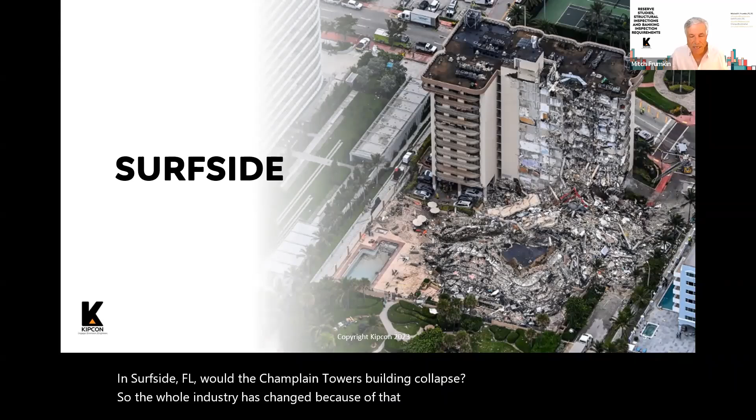Now, all of this started, as you're all aware, because of what happened in Surfside, Florida, with the Champlain Towers building collapse. The whole industry has changed because of that. Of course, 98 people were killed—it's an absolute tragedy. But out of tragedies, hopefully good things come out of them, and one of the things I'll talk about are some of the changes coming out of this that hopefully mean this can never happen again.

Now, for those of you who know me, you know I've been very involved in CAI for many years. I was president of the New Jersey chapter, the Pennsylvania chapter, and national president, among other things. I'm also one of the few engineers who not only does reserve studies but also gets involved in doing design specifications for existing buildings. Thanks to that background and my involvement with CAI National, I've had the opportunity to be involved in a number of interesting things that continue today.

For example, when the collapse first occurred in Florida, CAI immediately created a task force, which ultimately prepared a publication you can all get—it doesn't cost anything. It's called the Condominium Safety Public Policy Report. That report is pretty extensive, probably about 40, 50, 60 pages long. There were about 6 people from around the country who co-chaired this, and I was one of the co-chairs in developing this public policy report.

There were, I think, 2 managers, 3 attorneys—there wasn't another engineer among the co-chairs, so I was the only one giving a technical perspective. I had the opportunity to be involved as we pulled this whole thing together and issued it. We also reached out to over 600 people across the country for feedback, to other organizations like the American Society of Civil Engineers, and did research around the world to see what other people are doing.

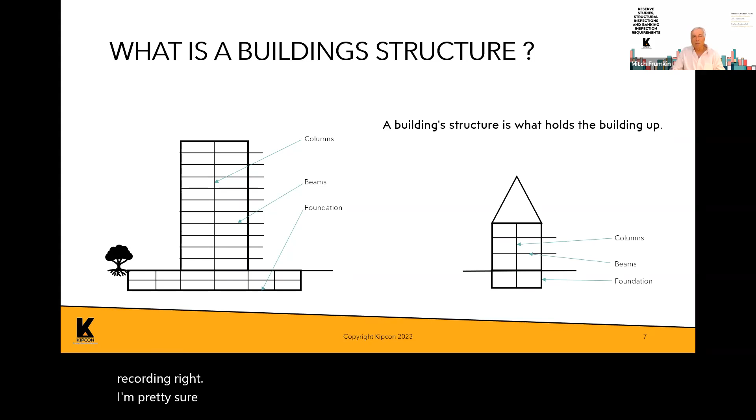Now you can see my pointer here, let me just make sure we are recording, right? I'm pretty sure we're recording this. Yes, you're good, Mitch. Oh, thanks, Chelsea — that's Chelsea, by the way, from Kipcon.

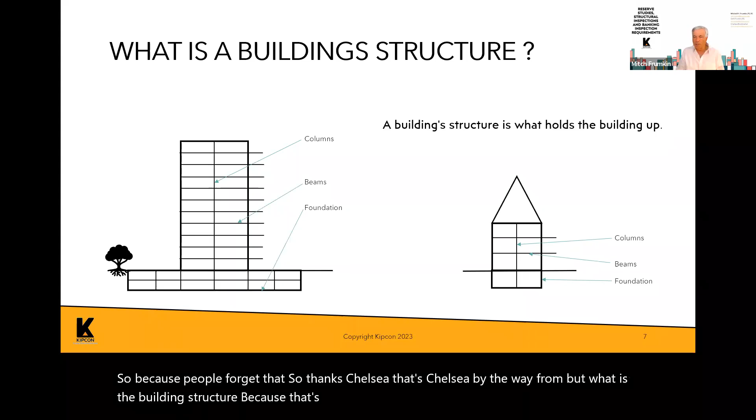But what is a building structure? That's the key to everything we're doing. The building structure is what holds up the building, that's essentially what it is. If you look at a building on the left, it's a high rise; on the right could be a townhouse, but it's made up of columns — the vertical guys that hold up the floors, the roof, and all kinds of things. Then there are the beams that go across the building that hold up the floors, and then there's the foundation. So a building structure is primarily made up of the columns and the beams.

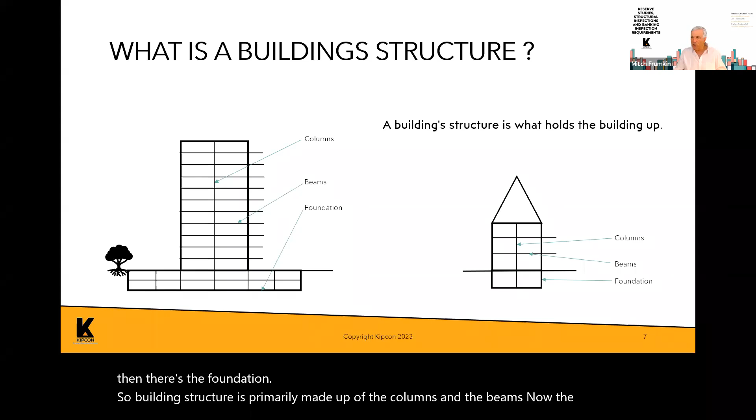Now, the reason I'm saying that is because balconies, such as you see here, are generally not considered part of the building structure, because they primarily support only their own weight — they don't support the weight of the building.

So if a balcony falls, like we saw in the picture, the building isn't going to collapse. But if a column or a beam in this building fails, then the building could fall down. So there's a discrete and pretty important difference between them that I'm going to touch on as I go through the presentation.

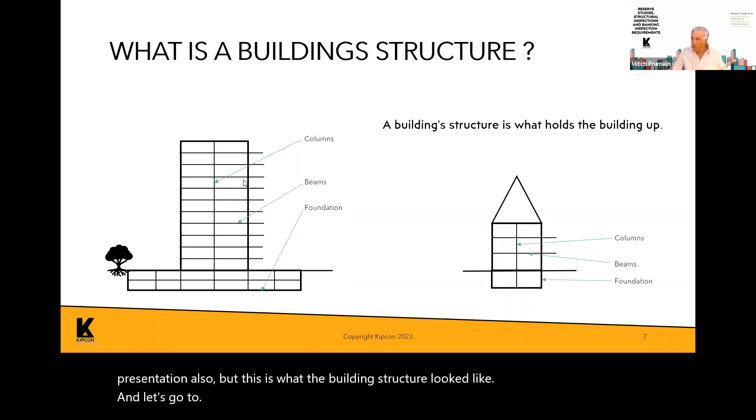But this is what the building structure looked like. And let's go to... let's see why aren't- if I go. All right, there we go.

So here is the building's primary load-bearing system. Now, the reason I use the term primary load-bearing system is because when you get into the regulations, both in CAI's public policy as well as legislation in New Jersey and other states, they use that terminology for inspecting a building.

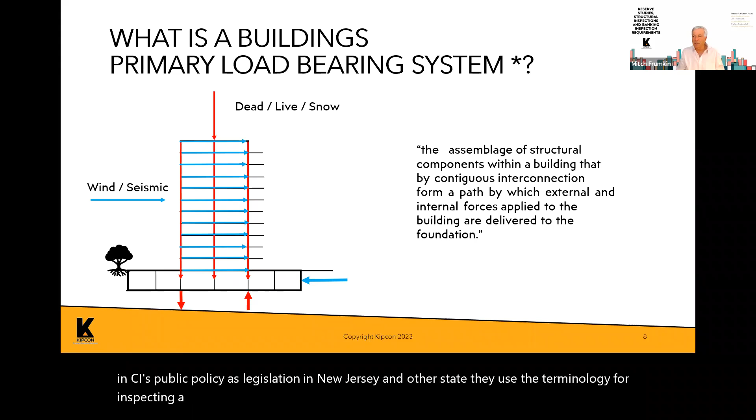The primary load-bearing system is the parts of the building that, if something happened to them, the building could collapse. The definition, taken directly from the legislation pending in the state of New Jersey as well as other states, is that the primary load-bearing system is the assemblage of structural components within the building that, by being connected to each other, form a path by which external and internal forces, such as wind, snow, and the weight of the building, are applied or delivered to the foundation.

So in this diagram, you see the weight of the building coming down vertically, the weight of the people inside, the live load, the snow on the roof, coming down through this bearing system in a vertical direction into the foundation. But from the side, you have wind loads and earthquake loads, which come in from the side and are also brought down to the foundation. That's the definition of primary load-bearing system.

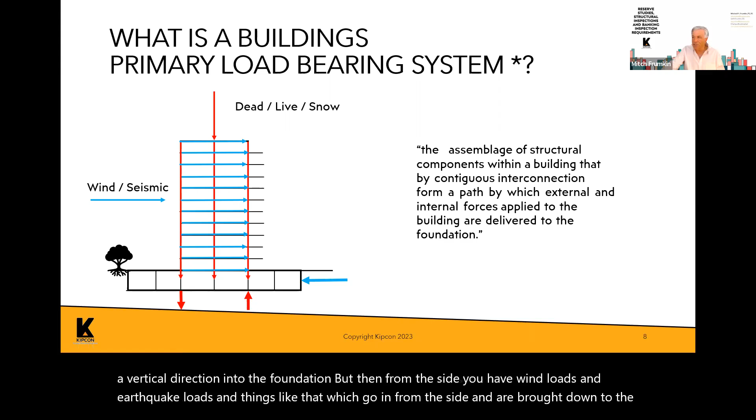Now, the reason why- some of these slides are relatively new, because things are changing, like I said.

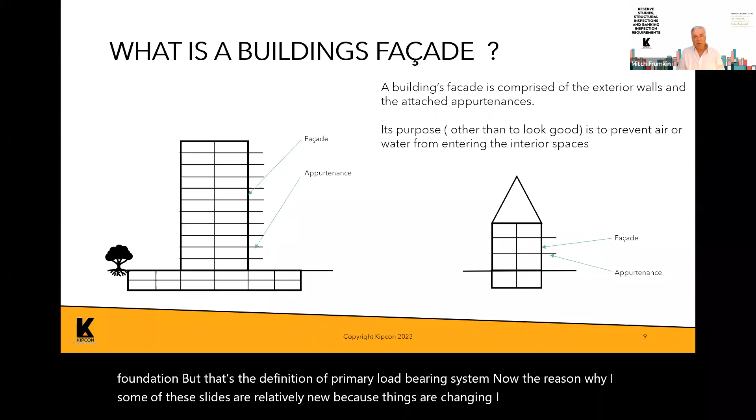Now let's talk about what the building facade is. The building facade is the exterior walls of the building. So for example, in this building, the exterior facade are these walls on the outside. The purpose of the facade is of course to look good and make the building look good, but it's also to prevent air and water from entering the interior spaces.

So these facades- now, when you look at definitions of facades in a number of different places, it says the facade is made up of the exterior walls as well as the appurtenances. That's a common word that's used. The appurtenances are the things attached to the facade, such as the balcony.

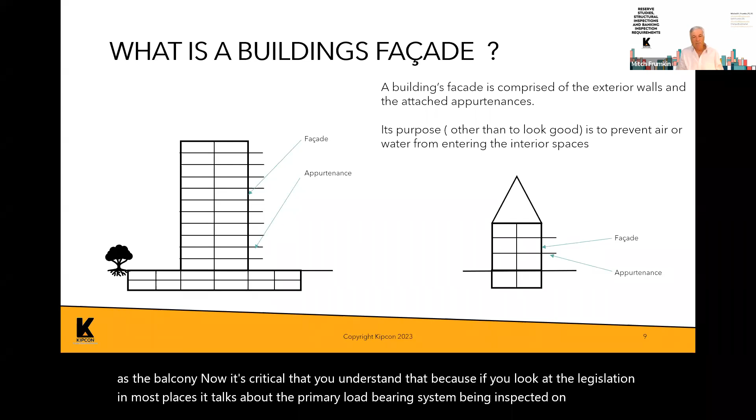Now, it's critical that you understand that, because if you look at the legislation in most places, it talks about the primary load-bearing system being inspected on a periodic basis, but it doesn't talk about inspecting the facade, which is critical, since the balcony is part of the facade, and the balcony can collapse.

Now, the original thought on this- well, let's put it this way: in about 13 or 14 cities across the country, there are facade inspection requirements where building owners are required to inspect the facades of their buildings. It's generally on a 3 to 5 year basis, to make sure that nothing on the building will fall and hit somebody walking by.

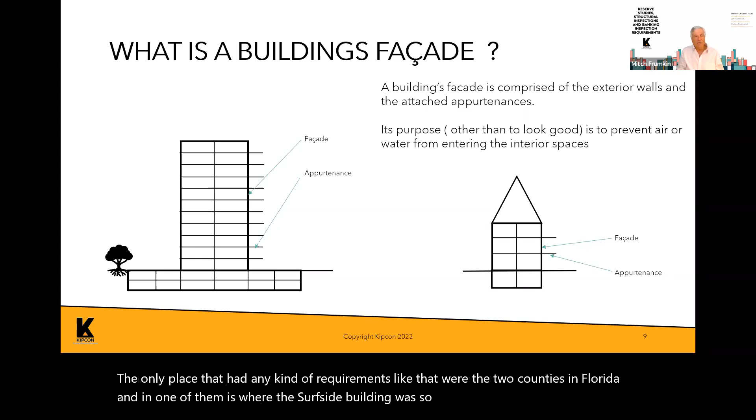But until recently, there was no place in the country with specific ordinances requiring you to inspect your building structure to make sure it didn't fall on the people inside. The only place with any kind of requirements like that were the 2 counties in Florida, and one of them is where the Surfside building was. So clearly the inspection frequency and things were not good enough to keep something like this from happening.

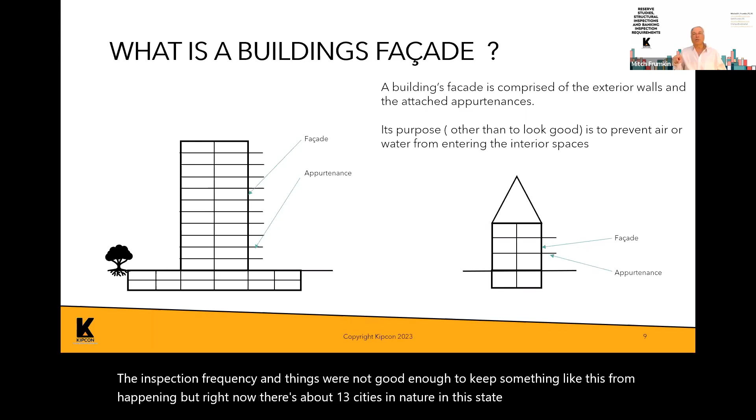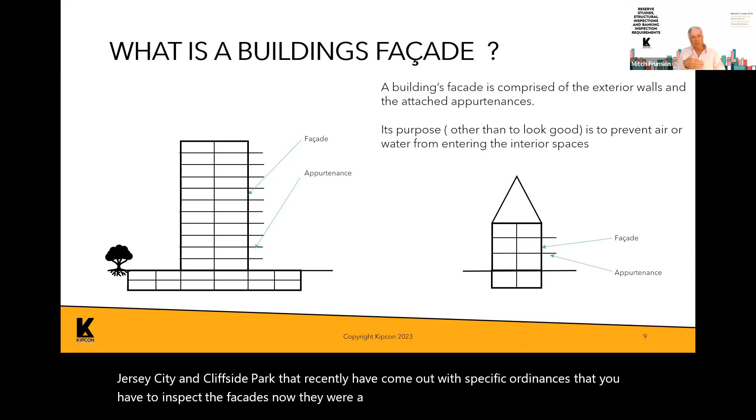But right now there are about 13 cities in the country that have facade ordinances. I'm going to show you that in the state of New Jersey, there are 2 localities, Jersey City and Cliffside Park, that recently came out with specific ordinances requiring facade inspections. They were a little ahead of the curve here in a good way, because, for example, the CAI National Public Policy is going to be revised, and one of the things on the agenda is the inclusion of facades and balconies into the public policy.

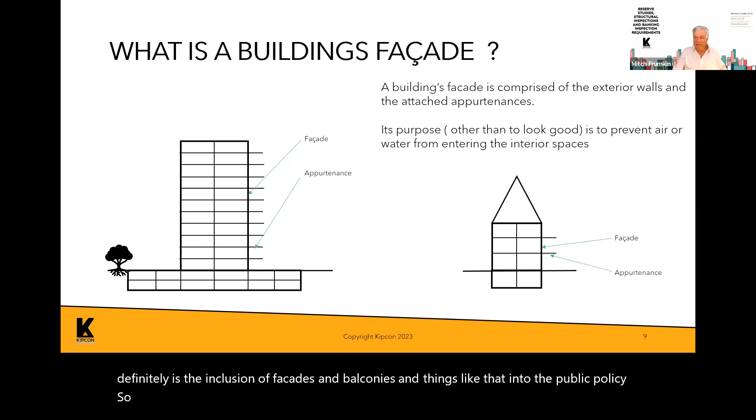So it's very important to recognize that everything I'm going to talk about, legislatively in New Jersey and every other place this is happening, as well as the public policy, talks about reserve studies and funding the reserves, not just doing one.

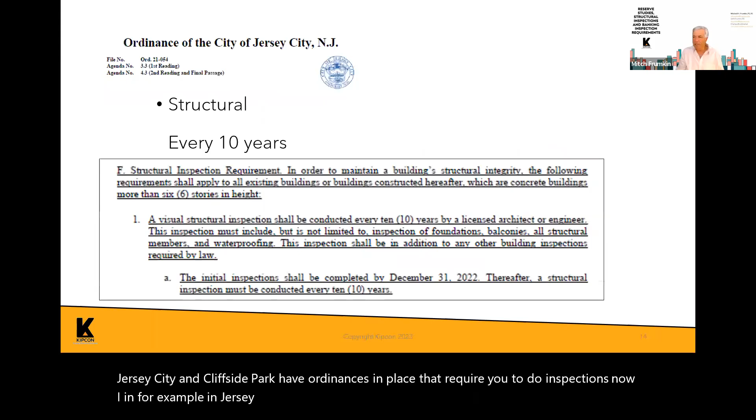And this is what it says, and I'm not going to critique it unless you call me on the side, and I'd be happy to, but it says: in order to maintain a building's structural integrity, the following requirements shall apply to all existing buildings or buildings constructed hereafter, which are concrete buildings more than 6 stories in height. Now, you'll see as I go through my presentation whether or not I agree with how it's defined, but they require this type of structural inspection by a licensed architect or engineer.

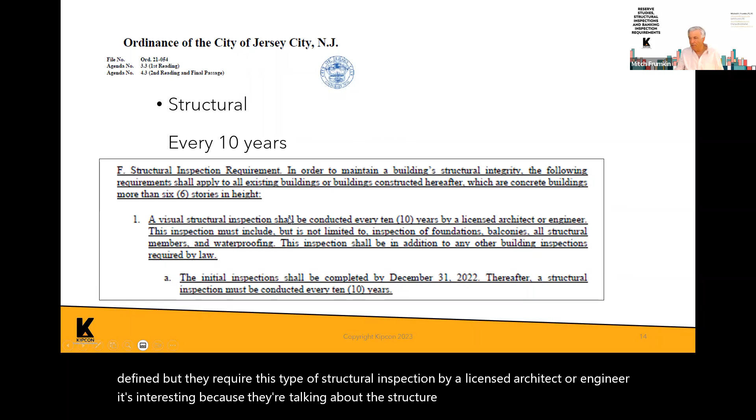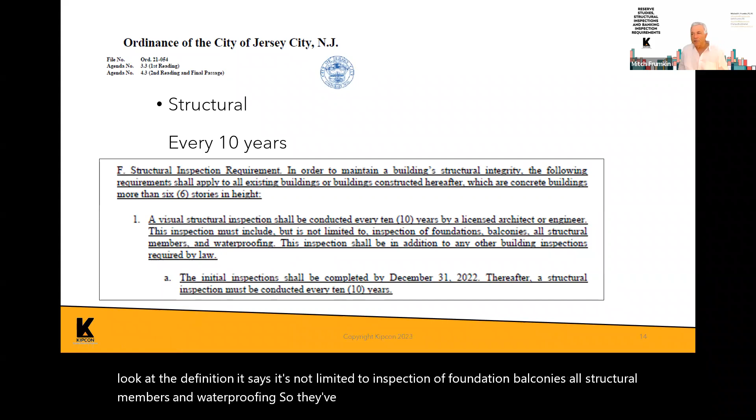It's interesting because they're talking about the structure. It's interesting but good. But if you look at the definition, it says it's not limited to inspection of foundation, balconies, all structural members, and waterproofing. So they've included some things in here in their definition of a structural inspection that are not, first of all, based on a primary load-bearing system.

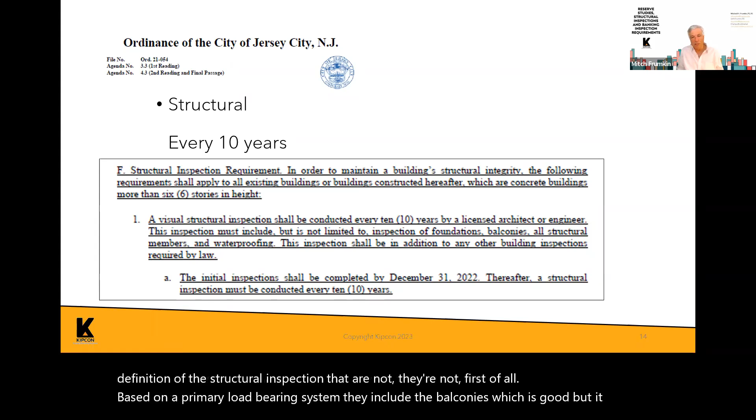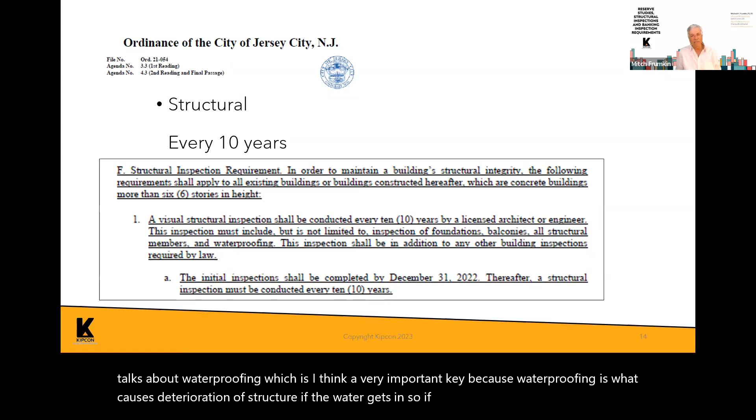They include the balconies, which is good, but it also talks about waterproofing, which I think is very important, because waterproofing is what causes deterioration of structure if the water gets in. So if the exterior of the building is kept functional and water doesn't get in, it'll reduce the likelihood of structural deterioration. The thing that's interesting here is, if you look at the definition of structure versus facade, you would think this waterproofing would be in the facade inspections, not the structural inspections.

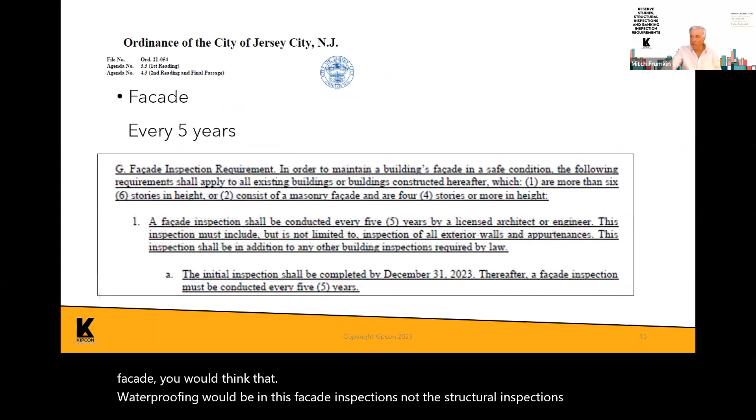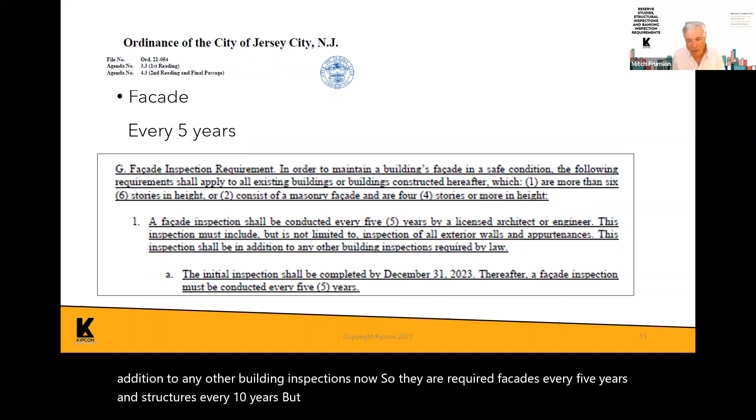But this is Jersey City. Here's what Jersey City says about facades, that they have to be inspected every 5 years. This must include inspection of the exterior wall and the appurtenances. This inspection will be in addition to any other building inspections. So they are requiring facades every 5 years and structures every 10 years, but they're including some of the things that you would think are included in the facade within the structure. So there's some different things going on here.

The other thing to keep in mind is they say that the facade inspections are for all buildings which are more than 6 stories in height, or consist of a masonry facade or brick and are 4 stories or more in height. So they're going into a little more specific detail of what's required to be inspected.

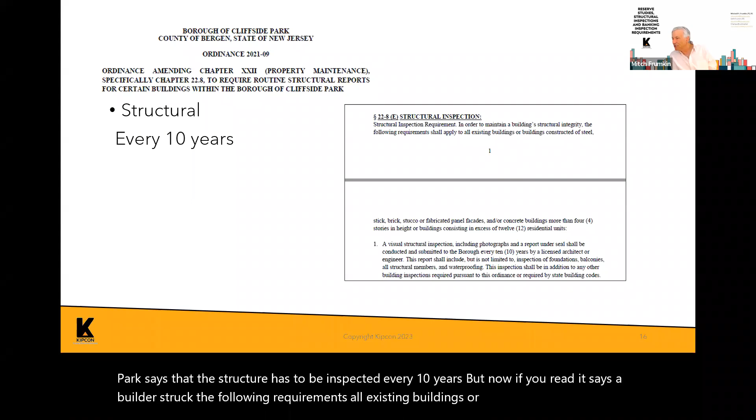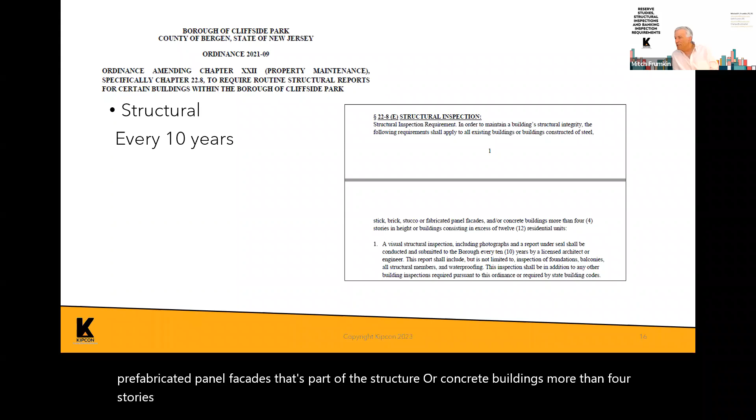So this is Jersey City. Now let's go on to Cliffside Park. Cliffside Park says that the structure has to be inspected every 10 years. But if you read it, it says it applies to all existing buildings or buildings constructed of steel, brick, stucco - stucco is generally a facade, not a structure - or prefabricated panel facades, that's part of the structure, and/or concrete buildings more than 4 stories in height, or buildings consisting of in excess of 12 residential units. So they're saying that if you have a residential building, irrespective of height, that has 12 residential units and is made up of these materials, it needs to be inspected.

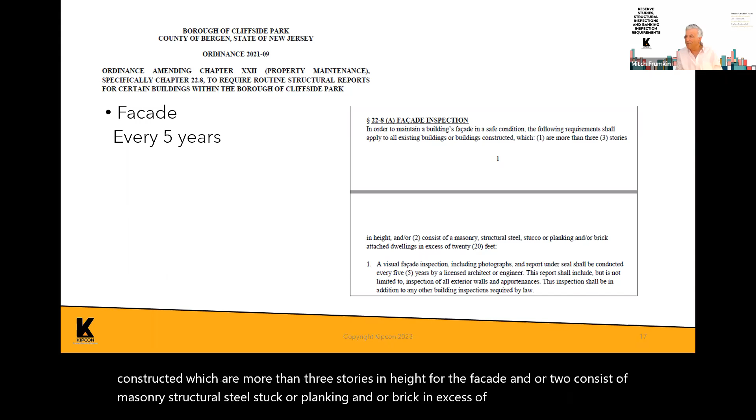But you see here that between Jersey City and Cliffside Park, there are differences in definitions of what's going to be inspected and how often. Now if you look at Cliffside Park for facades, it says every 5 years, and requirements shall apply to all existing buildings or buildings constructed which are more than 3 stories in height for the facade, and/or consist of masonry, structural steel, stucco or planking, and/or brick in excess of 20 feet. So they're saying that for the facade, you have to look at if it's more than 3 stories high or more than 20 feet in height. So you may have a 2-story building that's only 20 feet high, and it appears that it should be included.

But the point I'm showing you this stuff is, and it's not just New Jersey - these are some New Jersey examples - but for example, in Manhattan, they have Local Law 11 for building facades. They just came out in the last year or so with a specific requirement for inspecting parking garages. So I'm concentrating on New Jersey, but these types of regulations are happening or in place in a number of different places.

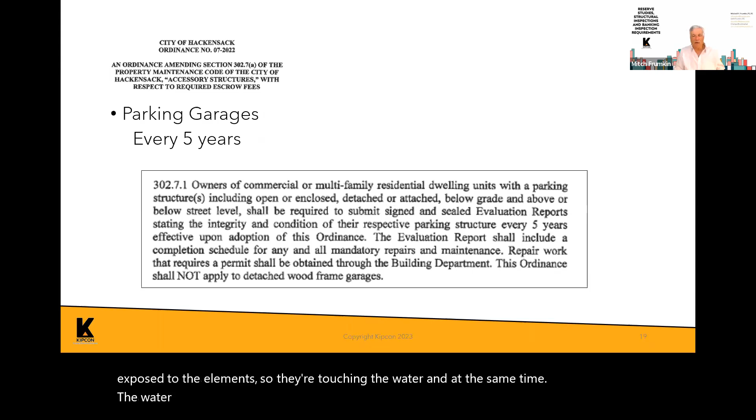Now, parking garages, as I mentioned before, are a high kind of risk structure because they're exposed to the elements, so they're touching the water, and at the same time, the water that's in there, especially in the winter, carries salt in it, which increases the rate of deterioration. So these are some of the things that are going on legislatively.

Now let's talk about this from a structural perspective, and now I'm talking about the legislation in New Jersey. Keep in mind the legislation in New Jersey, as of right now, is based on the primary load-bearing system.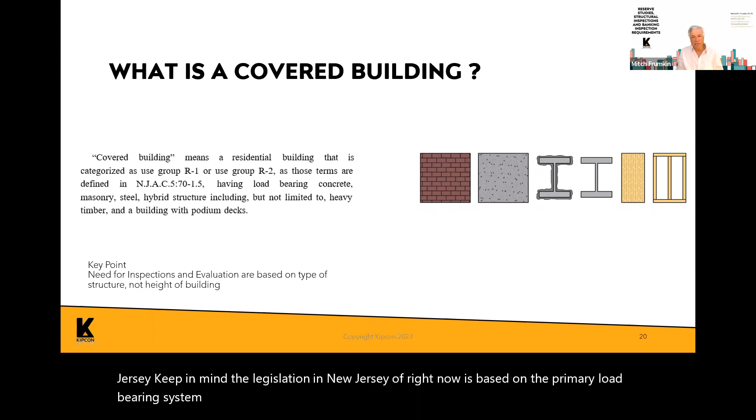Based on what happened in Sea Isle City with the collapse of the balcony, there has been a recent recommendation, in the last couple of days, that the legislation be updated to say primary load-bearing system and balconies on the exterior of buildings. So my guess is that if this legislation goes ahead, it is going to include balconies, but maybe not facades. We'll see.

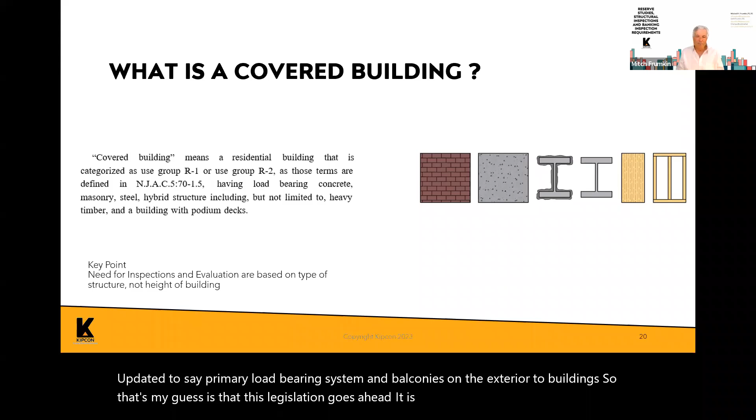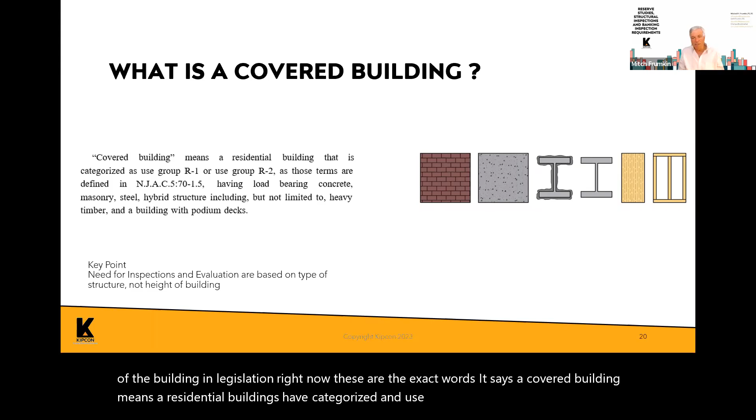It's like I said, it's a work in progress. But if you look at just the structure of the building in the legislation right now, these are the exact words. It says a covered building means a residential building categorized in use group R1 or R2, which means it's multifamily residential attached units, having load-bearing concrete, masonry, steel, hybrid structure, including but not limited to heavy timber and a building with podium decks.

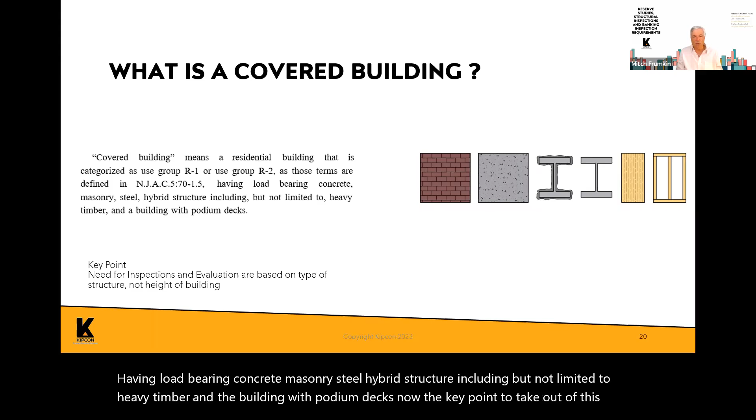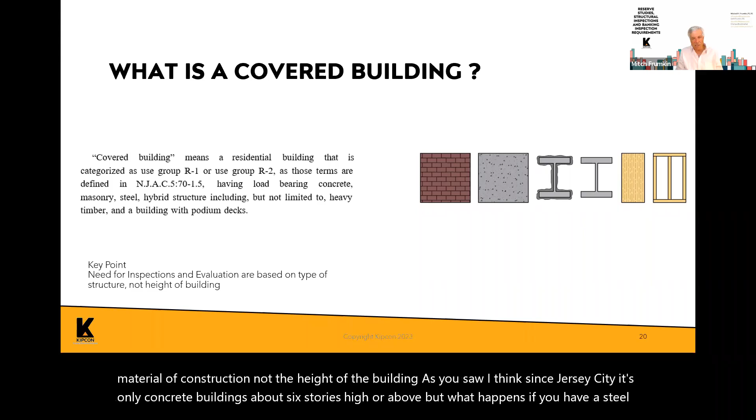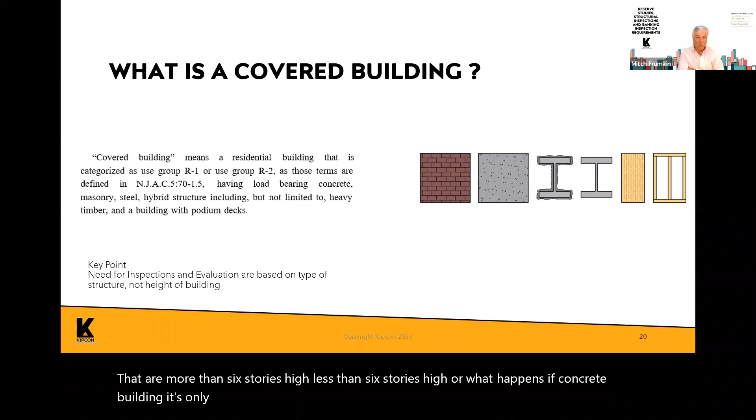Now, the key point to take out of this, which I consider to be the right way to do it, is that the structural inspections are based on the material of construction, not the height of the building. As you saw, I think it's in Jersey City, it's only concrete buildings about 6 stories high or above. But what happens if you have a steel building that's more than 6 stories high? I've seen problems with steel buildings more than 6 stories high and less than 6 stories high. Or what happens if you have a concrete building that's only 4 stories high? I've seen concrete buildings 4 stories high that have structural problems. So the key point to keep in mind is that the need for inspections and evaluation is based on the type of structure, the materials, not the height of the building, which is also what the public policy says.

There's the CAI National Public Policy, and there are also national standards put out by the American Society of Civil Engineers. There's one standard titled Evaluating the Structure of Existing Buildings, and it has guidelines for evaluating the structure, which all of these standards reference. It talks about inspecting buildings and evaluating based on materials, not based on height.

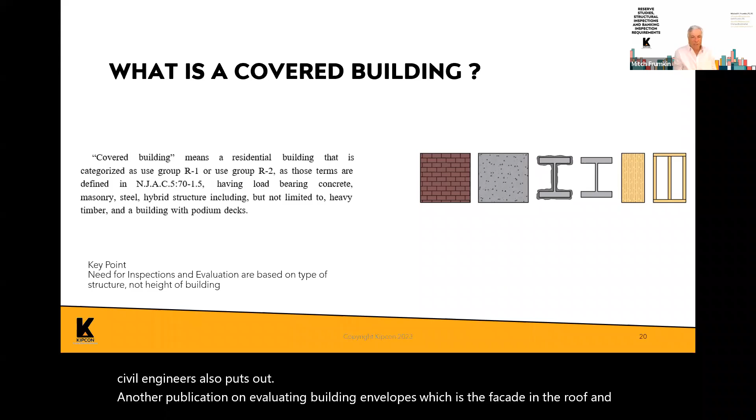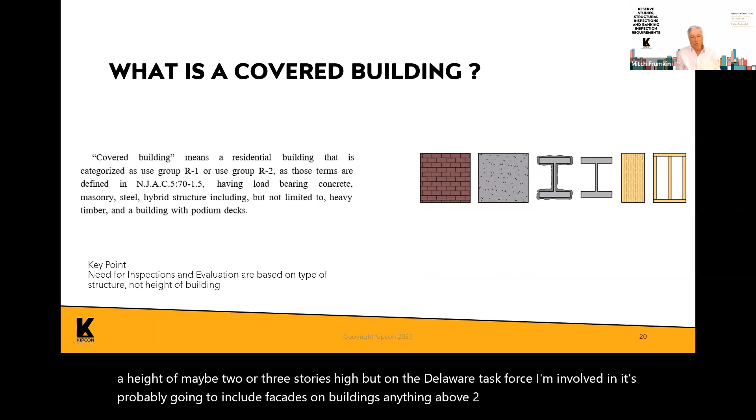When it comes to facades, it is generally based on height. The American Society of Civil Engineers also puts out another publication on evaluating building envelopes, which is the facade and the roof, and it talks about the height of the building. In most places it starts with a height of maybe 2 or 3 stories high, but on the Delaware task force I'm involved in, it's probably going to include facades on buildings anything above 2 stories high, because we want to make sure we capture all balconies, not just the facade itself. So, from the legislative perspective in New Jersey in regard to structure, this is what constitutes a covered building.

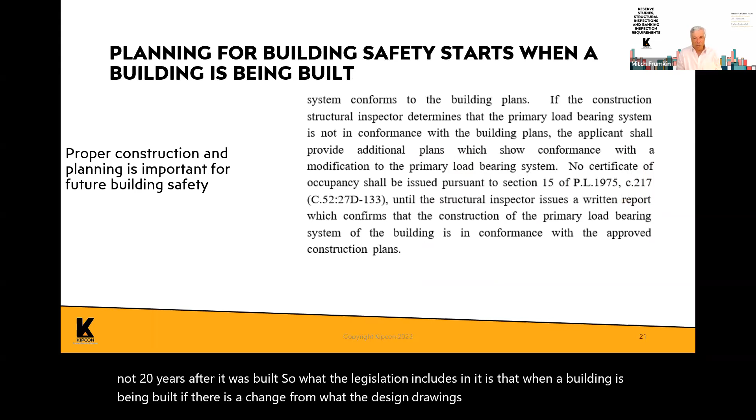There are other things in the current legislation, I'm not going into as much detail as yesterday, but I want to point out some things. It says that building safety starts when a building is being built, not 20 years after it was built. So the legislation includes that when a building is being built, if there's a change from what the design drawings show in regard to the structure, before a certificate of occupancy is issued for that building, there has to be an engineering report that says the structural adequacy of the as-built building is equivalent to what the design drawings show.

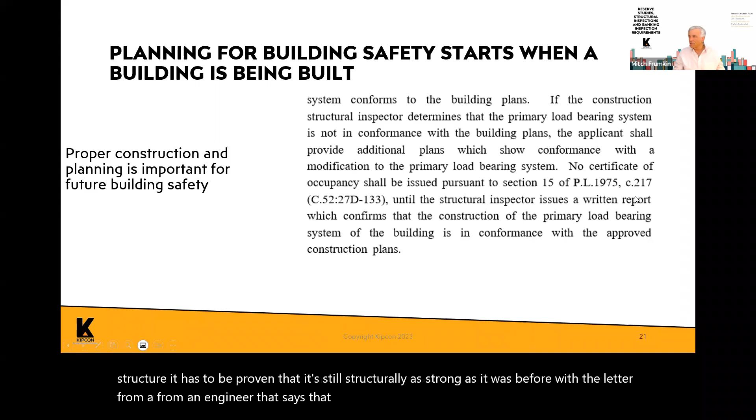Now, I think we all recognize that buildings are never built exactly the way the drawings show, but this clearly says that if it affects the structure, it has to be proven that it's still structurally as strong as it was before, with a letter from an engineer that says that. The structural inspector issues a written report confirming that it's equivalent. These are the exact words from the legislation.

Then what about the inspections? The legislation now says that for a building built after this legislation comes into effect, the first structural inspection takes place 15 years after the bill's passage, and I'll go back to that in a second, why. It also says for buildings built prior to the passage of this legislation, when it goes into place, for buildings that are 10 years or more since they were built, so at least 10 years old, the first inspection has to take place within 2 years.

For buildings that were built within 5 to 10 years, it's 4 years. And at buildings that were built in the last 5 years, the first inspection has to take place within 6 years.

Now, just so you know, the way the bill was originally written, it says that all buildings have to be inspected within 2 years prior to this legislation. But based on discussion, it was kind of agreed, and this is a pending modification, that there's so many buildings, how are you going to inspect them all within 2 years? So let's phase them in based on the age of the building, because deterioration that causes structural problems is a progressive problem. So if the building's newer, there's less chance of having these type of things happen.

The reason for the 15 years for buildings built after the passage of this legislation is that right now, if you build a new condo or community association in New Jersey, the developer is required to put together a reserve study in the governing documents. The legislation also requires that for all new buildings going forward, not only will it require a reserve study, but it's also going to require that a maintenance manual be included that outlines when the preventive maintenance should be done, what the preventive maintenance is, and what the cost of the preventive maintenance will be in the future.

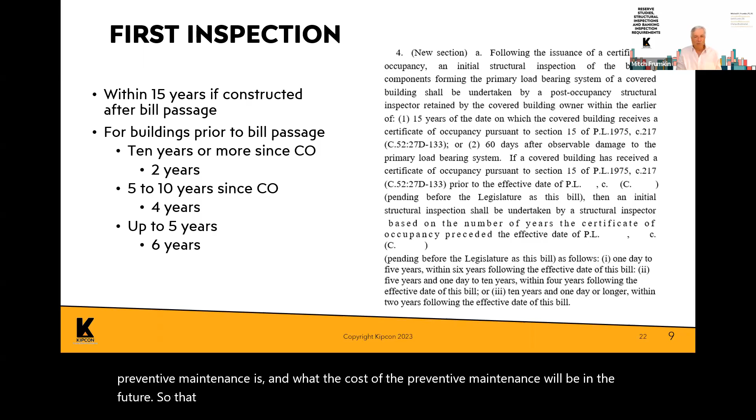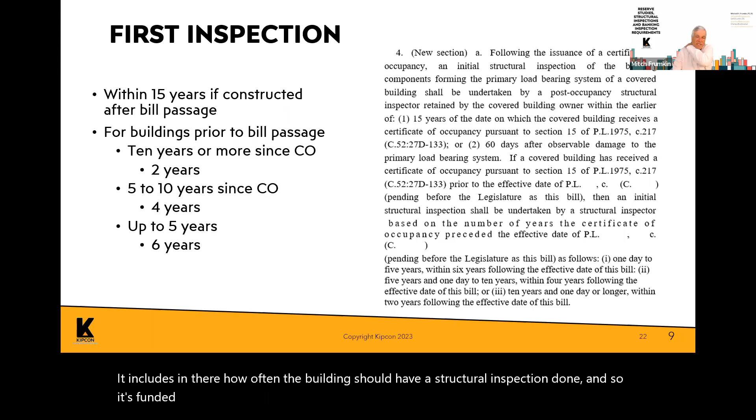So it was agreed that since there's going to be preventive maintenance put in place, the first inspection doesn't need to take place until later. But also the legislation requires that as part of that maintenance manual, it includes how often the building should have a structural inspection done. And it's funded also, and it's in the legislation that it needs to be budgeted for. So based on that, that's why it was agreed that 15 years after the bill's passage is good.

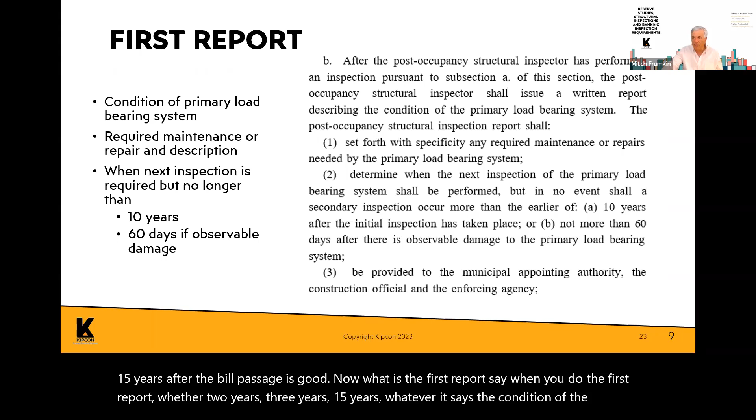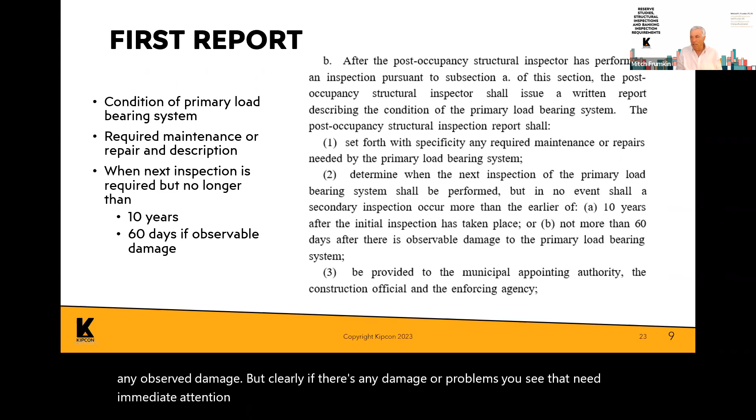Now, what does the first report say? When you do the first report, whether 2 years, 3 years, 15 years, whatever, it says the condition of the primary load-bearing system, any required maintenance or repair, and the description of what needs to be done. It also says when the next inspection is required, but it's no longer than 10 years from the first inspection report, or 60 days if there's any observed damage. But clearly, if there's any damage or problems you see that need immediate attention, it has to be taken care of right away.

So this is what the legislation says. And again, this legislation pretty much mimics what the national public policy says and what's being done in other states.

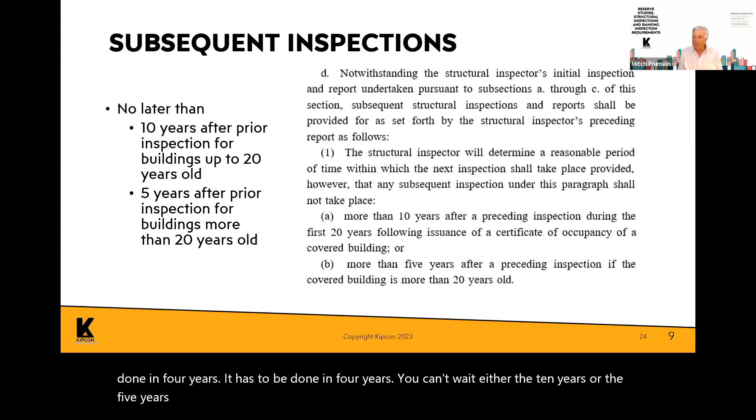So after the first inspection is done, what about inspections after that? For buildings that are up to 20 years old, inspection is a maximum of every 10 years. For buildings after 20 years old, every 5 years. But it says maximum. The reason it says maximum is because the prior report says it has to be done in 4 years - you can't wait either the 10 years or the 5 years. But this is what it says in the legislation. That's the bold points on the left, and on the right is the actual words from the legislation.

All right, now let's switch topics for a second in terms of mortgage lending changes. And again, it's very interesting because I've gotten involved in some interesting stuff. As a matter of fact, when it comes to Fannie and Freddie, you probably all know they've come out with forms to do inspections, and you have to confirm the safety of the building in order to get mortgages and refinances and all kinds of stuff. So they came out with a form, which you're all familiar with.

The reserve funding requirement was in there before. It's been there forever. What they generally say is that in order to prove adequate reserves, you have to be setting aside 10% of your annual budget into reserves. Up until a few years ago, it also said, or fund in conformance with the reserve study done in the past couple of years. Now, as of right now, Fannie says it's 10% of the annual budget. Freddie says it's 10% of the annual budget, but if you have a reserve study, you can go by what the reserve study says.

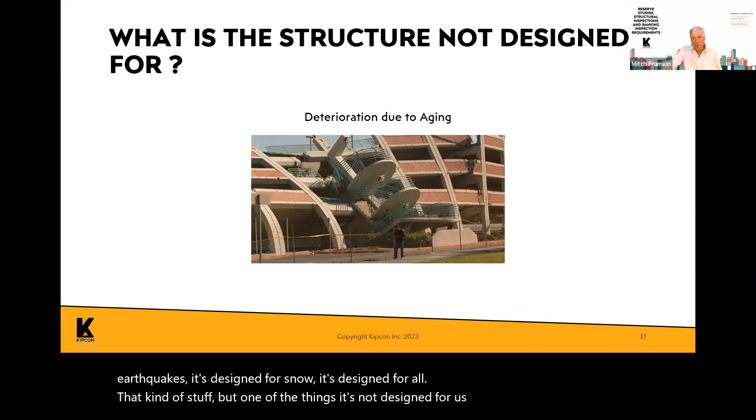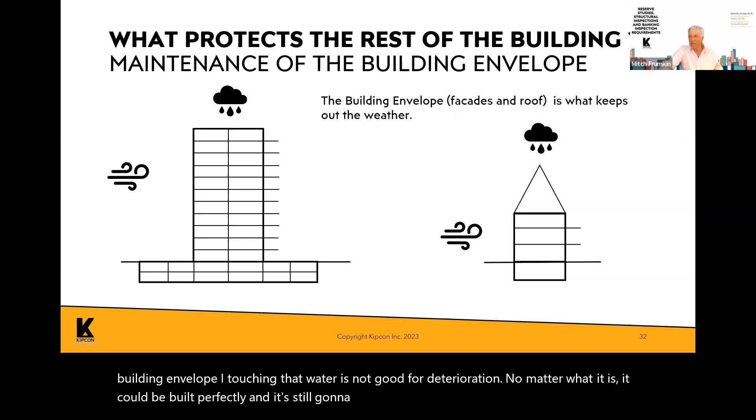So we talked about what a building is designed for. It's designed for the wind, earthquakes, snow, all kinds of stuff. But one of the things it's not designed for is deterioration due to aging. So that's what all of this is about. What protects the building? It's the maintenance of the building envelope. Water is not good for deterioration. No matter what it is, it can be built perfectly and it's still going to age, and water causes it to age faster.

So a couple things - what is maintenance? Maintenance is key to everything I'm talking about. A lot of people look at maintenance as one term, but it's the process of preserving something. It's very important to recognize there are 3 different types of maintenance you should be aware of. This is going to be detailed in 10 pages rather than 2 minutes in the upcoming best practices paper the CAI is issuing regarding maintenance.

The type of maintenance a lot of people do is called deferred maintenance. Deferred maintenance means you defer it and you don't do it. Deferred maintenance is not what you want to do, because you're not doing anything. So there are 2 other kinds of maintenance you should be doing.

The first is preventive maintenance - a proactive plan to maintain something so it stays in good condition and attains its useful life. For example, if you have something on your reserve study with a 20-year life, preventive maintenance will make sure you get at least that 20-year life out of it. But there are other things that are part of your building, like the structure, that aren't on your reserve study. The structure should have some type of preventive maintenance done to it. Sometimes preventive maintenance is as simple as doing an inspection to make sure the condition is good, but it's proactive - something you plan to do.

Corrective maintenance is when you don't do maintenance and something happens to the building, so you have to correct it - that's called corrective maintenance. It's something you can't plan for, following detection of a problem. A lot of times it's because you used deferred maintenance instead of preventive maintenance. There's going to be a quiz on this soon, by the way.

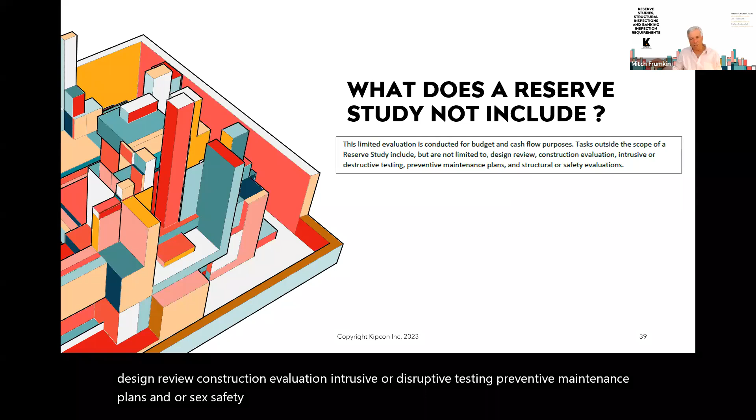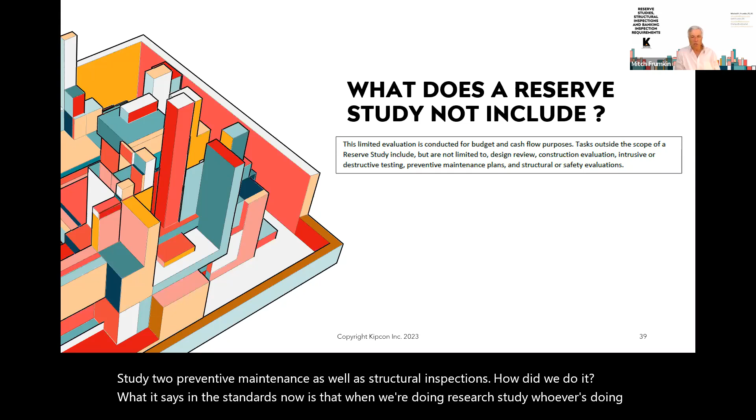So the question is, if we were trying to connect as part of these new standards the reserve study to preventive maintenance as well as structural inspections, how did we do it? What it says in the standards now is that when we're doing a reserve study, whoever's doing it, we have to talk to our client to find out, do you have a preventive maintenance plan in place? If they don't, we need to highly recommend that they put one in place. And if they don't have one, we have to adjust the estimated remaining lives of the components on the schedule to reflect a lack of maintenance.

Right now a lot of times the assumption is made that if a standard says a wood deck will last 20 years, just picking an example, that we use 20 years in our reserve study. But the 20-year life on the wood deck may be based on doing something to it so it attains the 20 years. But if we go and do an inspection and see that there's no maintenance being done, we will reduce the estimated remaining life and the full useful life of those decks in the reserve study to reflect a lack of maintenance. So it specifically says that in terms of what the reserve provider should do in the standards.

Keep in mind also that every state I know of that's instituting new regulations in regards to reserve studies says that the reserve studies prepared should be based on the most current version of the reserve study standards put out by the Community Associations Institute. So they're all tying back into that as the standard, as is the legislation in the state of New Jersey. So that's how we address that.

Keep in mind that some reserve providers like myself not only can do reserve studies, but we can put together a preventive maintenance plan for the community, but other reserve providers can't do it. So there was pushback from the group that we shouldn't actually do the preventive maintenance as part of the reserve study, but we need to reference it and adjust the reserve study results to reflect it.

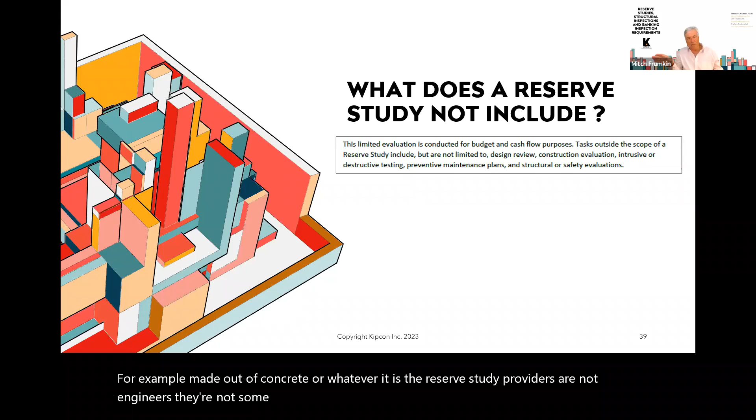But the reserve study should include in it the cost of doing the periodic structural inspections and the frequency that you should do them. So the reserve study is going to be a placeholder for the cost of doing the structural inspections, by saying to the community, for example, if it's the type of building I'm talking about, we include in the reserve study an estimated cost for the periodic inspections and the timing for it. The other thing it includes in the reserve studies now is the cost of the update. Most people don't have in their budget a line item that says update reserve study every 3 years or whatever. So now that's included in the reserve study. It should include the cost of the update.

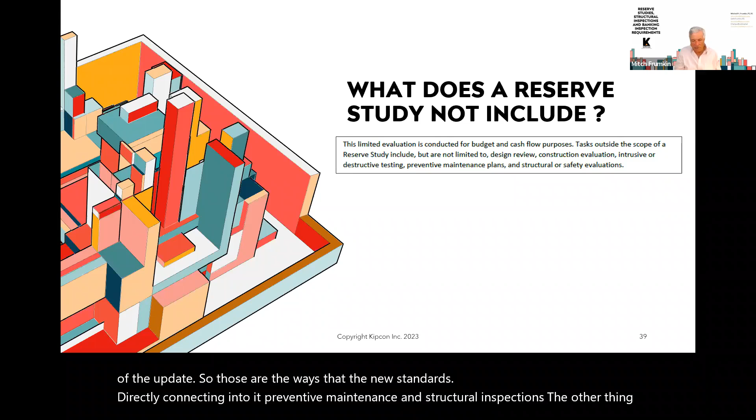So those are the ways that the new standards are directly connecting into it: preventive maintenance and structural inspections. The other thing, which I'll mention now since I only have 12 minutes left, is that most things on a reserve study are based on a cyclical replacement time period—every 10 years you have to replace this thing, and this is how much it is.

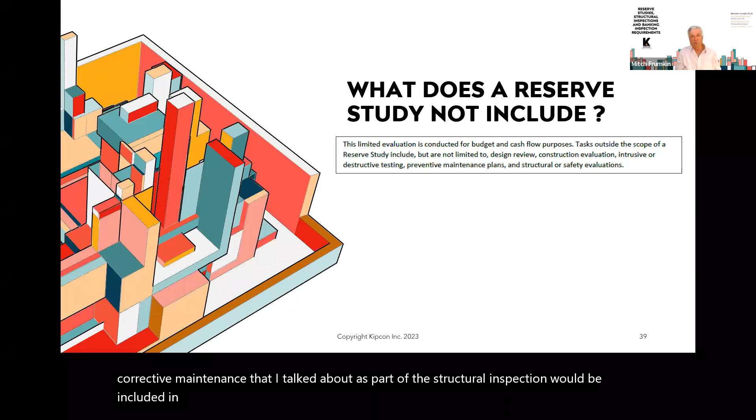That's changing also. The corrective maintenance I talked about as part of the structural inspection would be included in the reserve study. So when you're doing a reserve study, even though it only has to be done once to fix something, it's included in the reserve study—it's not cyclical. Keep that in mind, because one of the things we need to ask for as part of the disclosures when we do a reserve study is copies of any periodic structural inspections you've had done, so we can incorporate the results into the reserve study.

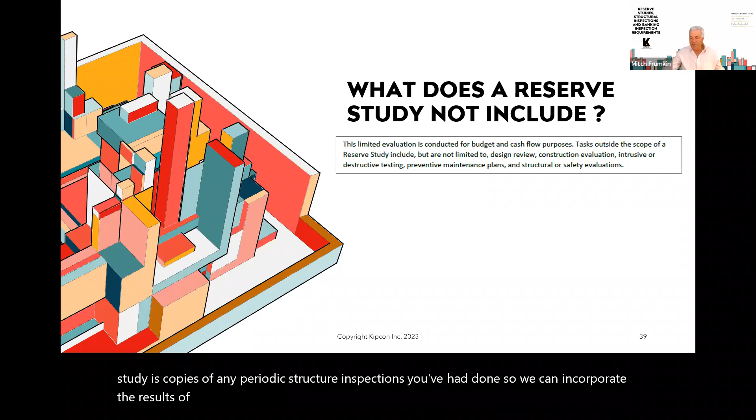So these are some of the things that are going to be in the new standards. This is directly from the new legislation in the state of New Jersey. Right now, the way it works is that when a developer builds a community association, the developer has to put together a reserve study in the governing document budget. Once the community takes over, there's no statutory requirement that the community has to do a reserve study. That's one of the reasons we may run into problems, because people don't fund them after they take control, since they want to keep the fees low.

The new statute, the legislative requirements, say that associations have to do reserve studies. They have to do them, and they have to fund them, and they have to be adequately funded. I'm not going to go into the exact words, but that's what it says. It also said that they should be done in conformance with the reserve study standards of CAI, and it should be prepared by a reserve specialist, a licensed engineer, or a licensed architect, but either way it has to be done in conformance with the CAI standards. So it's going to be a requirement.

Now the question—and it should be—is if they don't have a reserve study within the last 5 years, it has to be done within the next 2 years. Now the question comes up: what happens if that reserve study, when it's done, shows that it's not adequately funded?

Let me define for you quickly what adequate funding means based on the national definition. Inadequate funding means that you're not going to have enough money in the reserve study to replace something, and you're going to have to get money from somewhere else, whether it's a special assessment or borrowing—there's not enough money in the reserve fund. That's the definition. I'll touch on it later because I still think that may be too low, but that's what the definition is in the legislation as well as the national standards.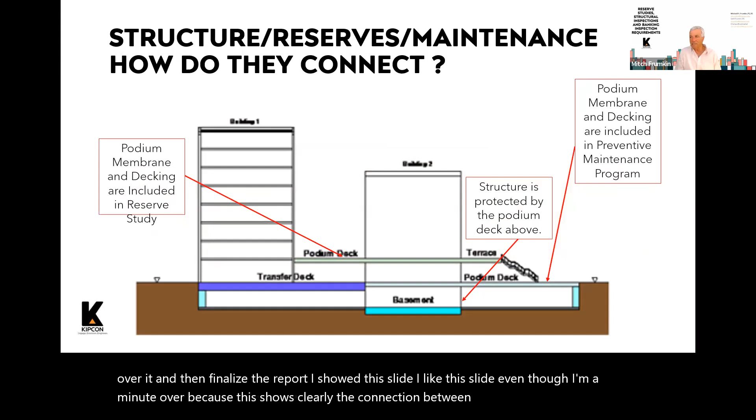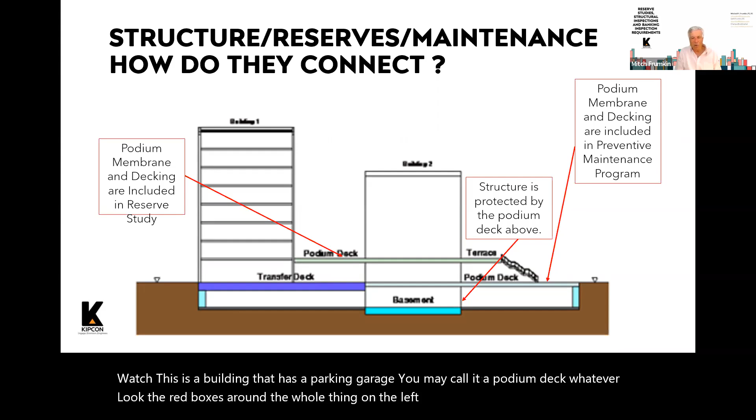This shows clearly the connection between reserves, maintenance, and the structure. This is a building with a parking garage - you may call it a podium deck. See the red boxes around the whole thing on the left. The podium deck has a structure underneath it, and it's made up of things like a membrane that go on the reserve study. Let's say you have a 20-year life on the podium deck.

The podium deck also needs ongoing maintenance. If you don't maintain it, water will go through it, and you'll have to replace it in 10 years instead of 20. If water goes through the podium deck, say at an expansion joint, it will deteriorate the structure underneath that's supposed to be protected by the deck.

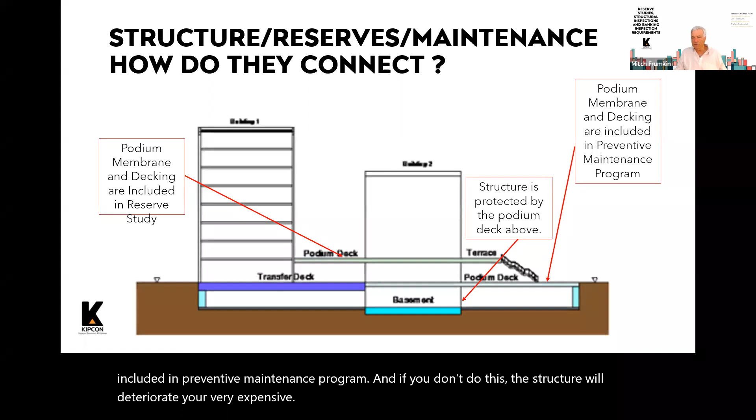So this diagram shows the connection - the podium membrane and decking are included in the reserve study, while the membrane and decking should be included in the preventive maintenance program. If you don't do this, the structure will deteriorate, you'll have very expensive corrective maintenance, and the useful life of the podium deck will be significantly less. So you can see, from a life cycle cost basis and an everyday cost basis, the connection between all three and their importance.

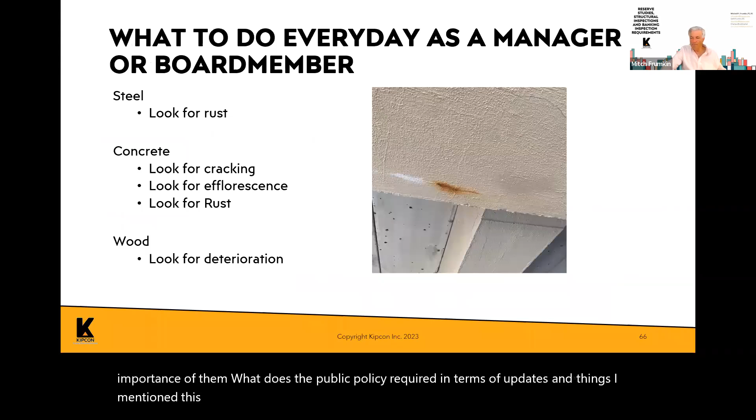What is the public policy required in terms of updates and things? I mentioned this already - what do you do as a manager or board member as you're walking through communities? I just have a couple slides left.

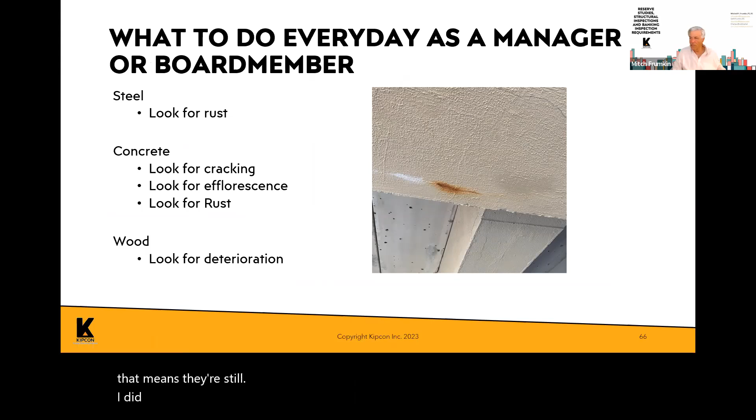If you see conditions like this, you don't have to be an engineer to identify that if something's rusting like this, there's steel behind it and it's affecting the structure - you do something. If you just see this white material, it's called efflorescence, meaning water is coming through, but you don't have rust yet.

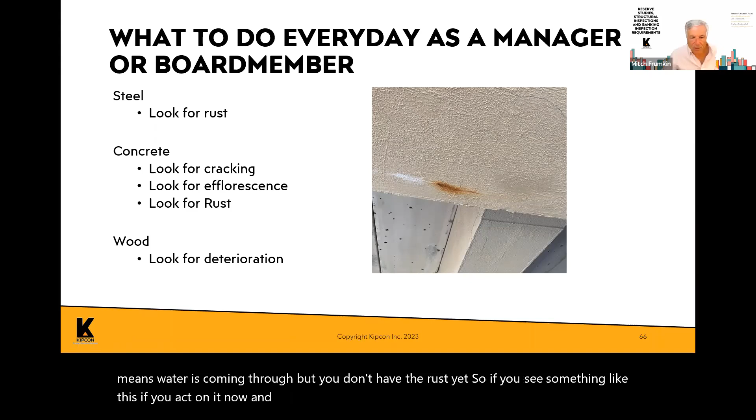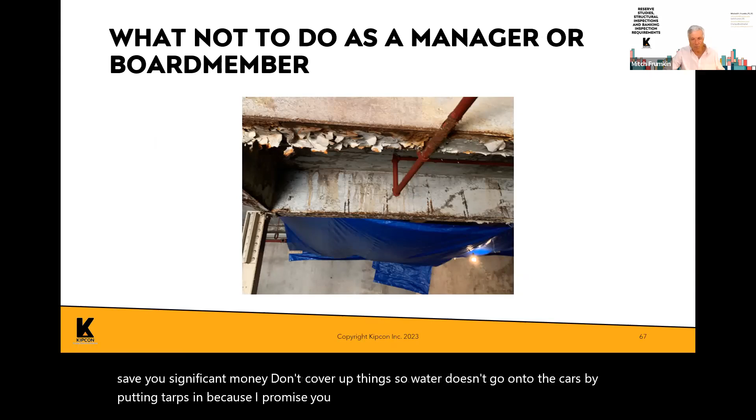If you see something like this and act now to stop the water, it'll reduce the cost of corrective maintenance and save you significant money. Don't just cover things up with tarps so water doesn't go onto the cars - when we took this blue tarp away, the structure was pretty much shot. If you see rust, figure out what's happening, because it could affect the structural integrity of the building.

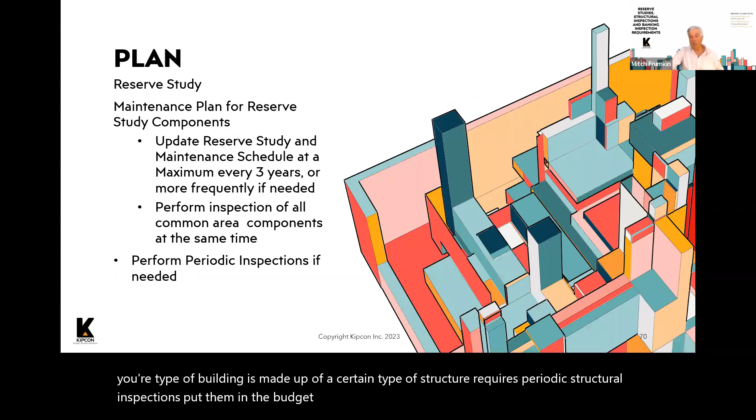So what's the plan? Implement a proactive preventive maintenance program along with the reserve study. If your type of building requires periodic structural inspections, put them in the budget and do them - you may be forced to do them pretty soon. Update the reserve study on a regular basis.